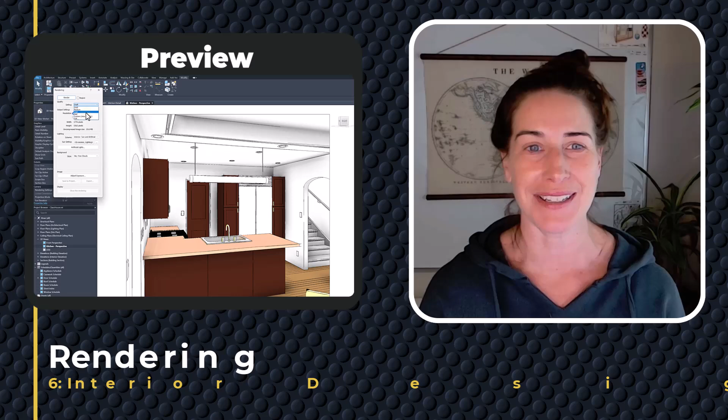In this video, we'll create our rendering. When I'm completely happy with my kitchen design, a nice final touch is to create a render.

To do that, I'll open up my kitchen perspective from the project browser and turn on a shaded view to get a look at some of the materials I've created so far. The rendering will really highlight both your lighting scheme as well as material choices, so it's worth spending time to get those how you like before creating the render.

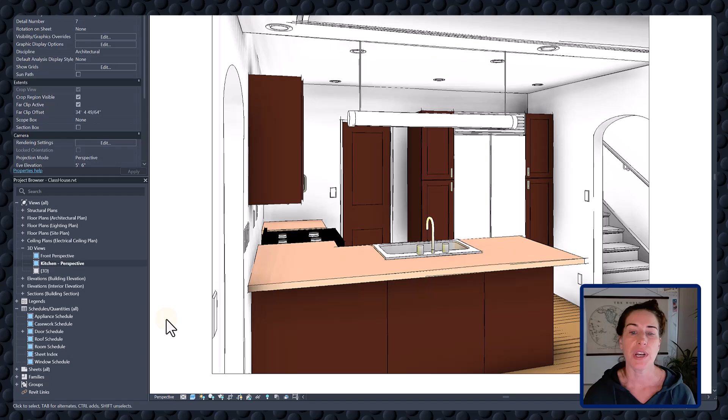When everything is as you like, go to the View control bar and choose the teapot option. For your first render, I highly recommend keeping it at draft, since higher resolutions will take quite a bit of processing power on your computer.

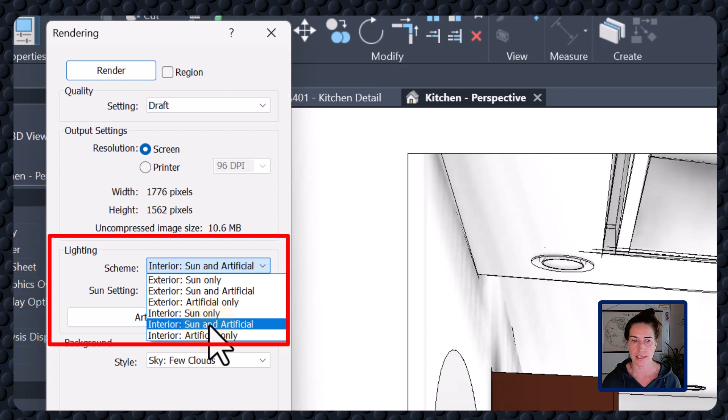Under lighting scheme, you can choose to have an interior lighting scheme that will show both the sun and artificial lights, or just artificial lights. Experiment with both to see what looks best for your design. Under lighting, you also have the option to dig into the strength of the lights that have been placed. I typically keep all of these set at the default, but you're welcome to play around if you like.

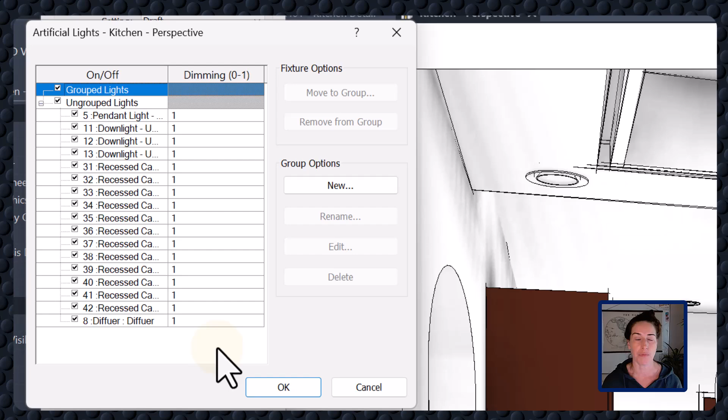I'll hit OK to bring me back to the main render dialog. When my settings are how I like, I'll hit render to create the draft view. I'll get a progress bar indicating how much time it would take. Because we're working in draft, this should go fairly quickly. If you were on a higher resolution, you might want to leave this to process overnight.

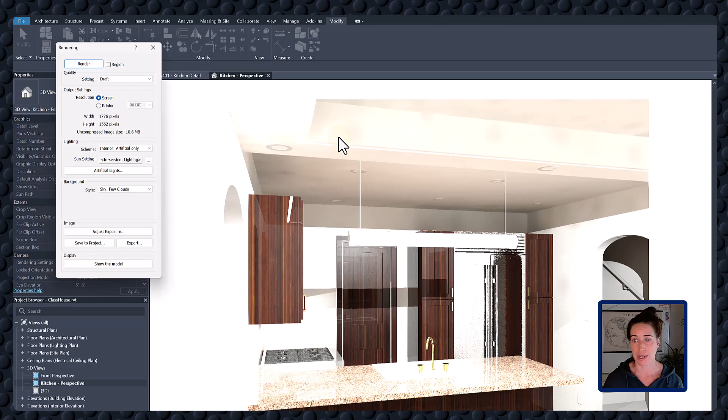Once the render has been completed, before getting out of the dialog box, under Image, you can choose to adjust the exposure. In my case, things are looking a little bright to me, so I'll go ahead and make them darker and hit Apply.

I also have the option to mess with highlights as well as shadows. If you need to reset at any point, you have that option. When the exposure is how you like, you can hit OK.

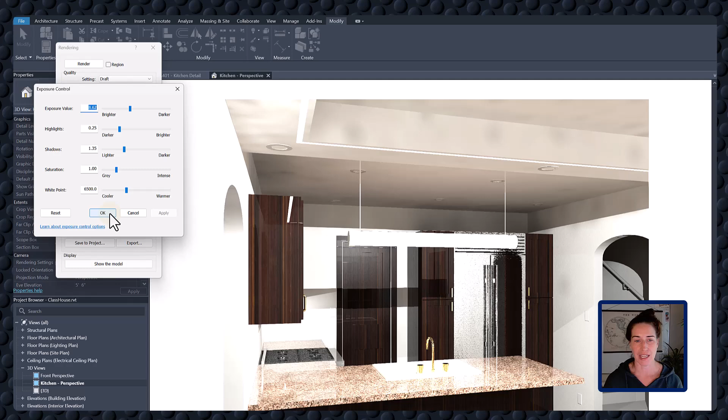Finally, to save this rendering to our project, we need to click the Save to Project button. I'll give it a name and hit OK. You have the option to export here if you're working in other documents as well, but before closing the render, make sure you at least save it to your project.

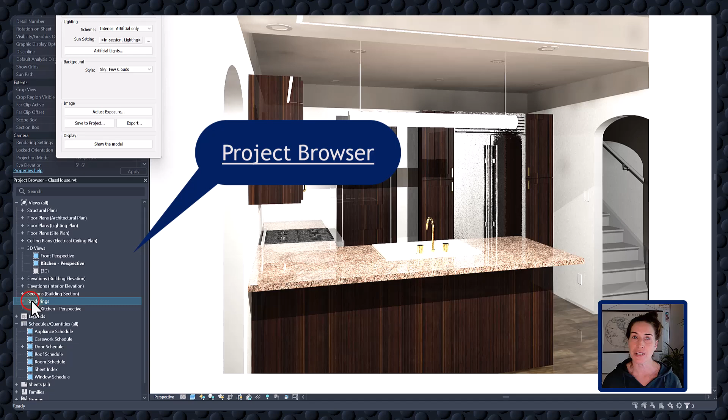Notice a render folder has showed up in my project browser and my kitchen perspective is there. I can then go back to my kitchen detail sheet and rearrange to fit both views, or in my case, I might delete my active 3D view and add the render.

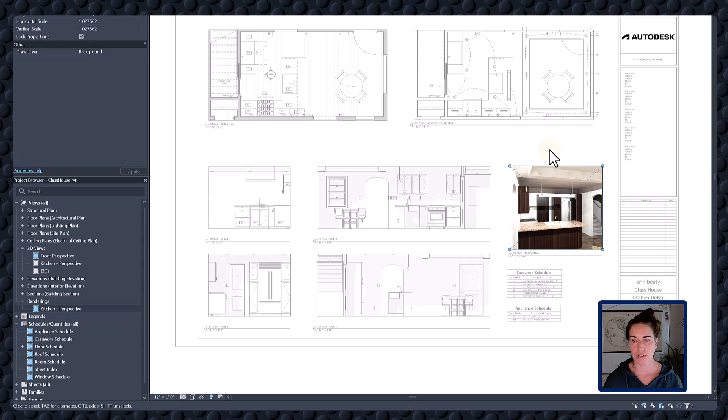If it doesn't quite fit so nicely, you can click into the render and choose to scale the image. One thing to note about this render, it's no longer an active 3D view - it's just a picture that I've produced, so I can't go in and edit the elements anymore.

As a reminder, in this video, we looked at different options you have when it comes to rendering an interior view. I hope this helps.